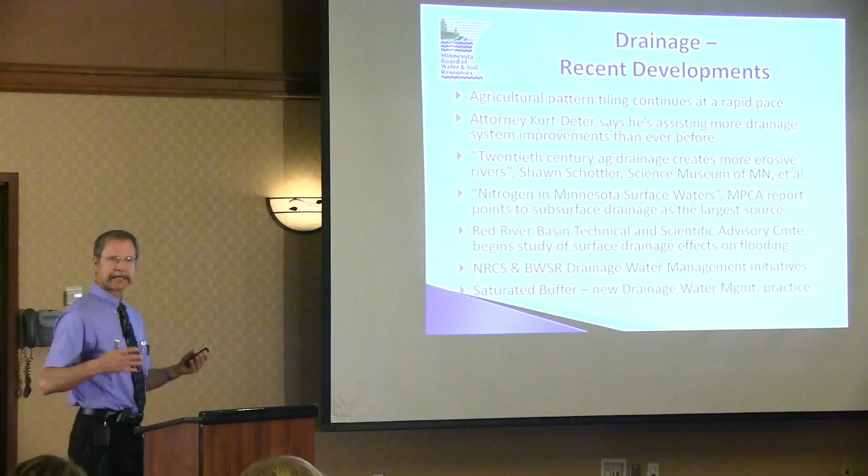What are some of the recent developments driving this? We know that pattern tiling continues to occur at a rapid pace. For a lot of folks in the city, that's a concern. For a lot of you on the farm, that's an improvement, an ability to improve productivity and move forward. Many of you might know Kurt Deter, an attorney who works for many drainage authorities, and in the last year he's said he's been assisting more drainage improvement projects than ever before. So there are a lot of drainage activities occurring, and for a lot of folks that's a concern, for a lot of folks that's progress.

Some of you have probably seen the report that Shawn Schottler and others from the Science Museum of Minnesota published this summer, called '20th Century Ag Drainage Creates More Erosive Rivers.' It's based on data from the Minnesota River Basin as a start, but then they looked at 21 different watersheds across the state to discern the effects of ag drainage on river flows and erosion. Brad referred to the Nitrogen in Minnesota Surface Waters report, a recent report by MPCA, which pretty clearly points to subsurface drainage as the largest source of nitrates and nitrogen in our surface waters. So that's a challenge.

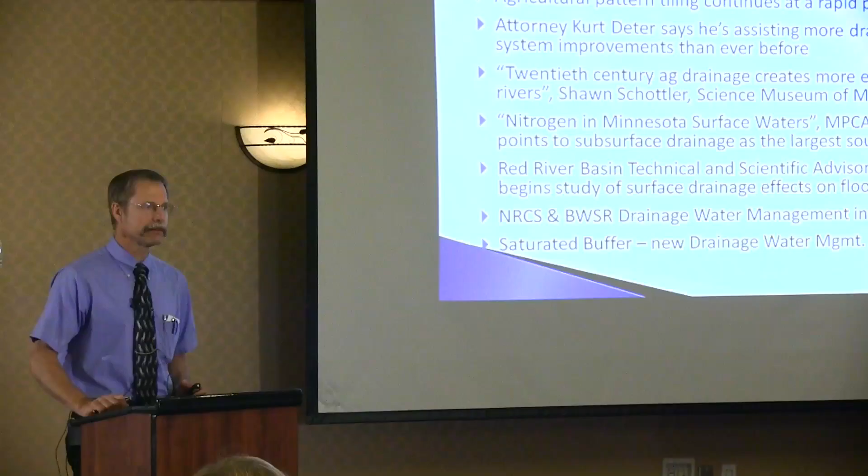The Red River Basin Technical and Scientific Advisory Committee is beginning a study about the effects of surface drainage on flooding. That group, of which I'm a member, did produce a couple of reports in the last two years about the effects of subsurface drainage on flooding. So something else that's worthy of review and consideration.

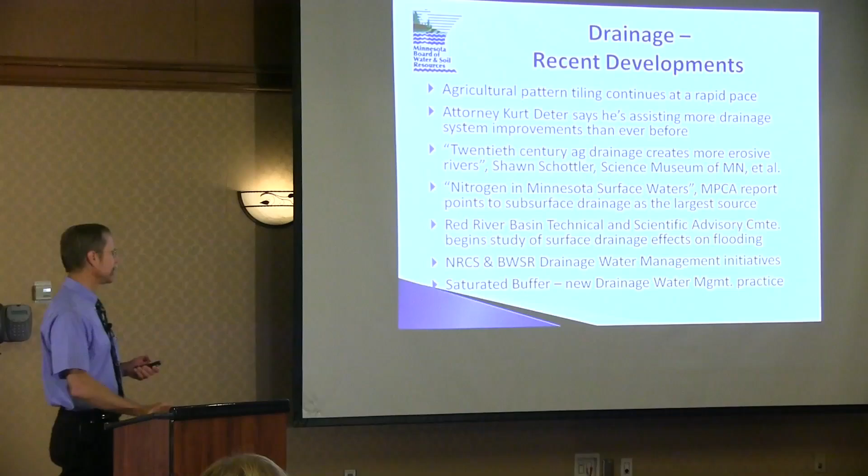In recent years, both NRCS, the Natural Resources Conservation Service, and BWSR have had drainage water management initiatives, trying to provide more financial and technical assistance for drainage water management and conservation drainage practices. Saturated buffer is a relatively new practice, and the first one in Minnesota is on Doug Albin's farm. Doug will be talking about that and other things when he's on at 11:30 today.

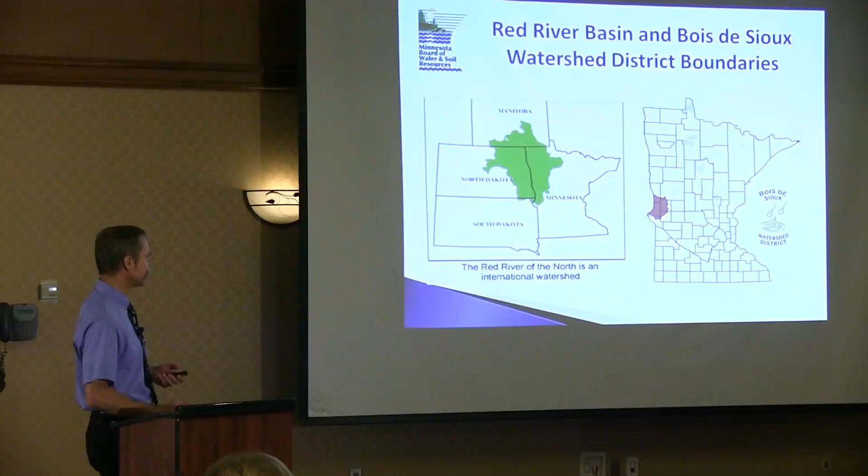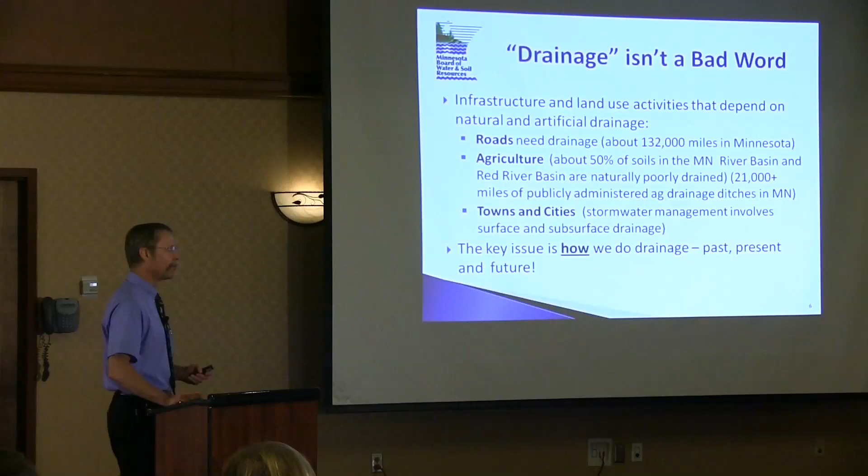This is a slide that I've used a number of times, and it has different reactions from different folks. But I believe that, in fact, we should consider drainage to not be a bad word, that it's been going on forever, within our state.

It's very important for roads to keep them drained so that they remain unsaturated and passable. And in agriculture, within the Minnesota River Basin and the Red River Basin, about half of the land without some drainage is very difficult to farm. Keep in mind that the publicly administered ag drainage systems across Minnesota, Chapter 103E drainage systems, total more than 21,000 miles. So it's a vast infrastructure of drainage.

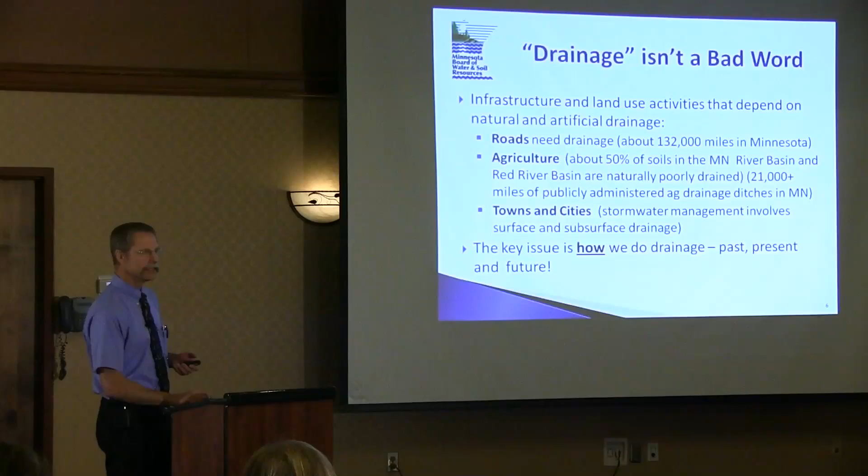And it isn't just agriculture that needs drainage. Towns and cities, stormwater management is a very important part of flood control within urban areas as well. So the way I try to stress this is that it's not a question of whether we're going to drain. We always have drained and we'll continue to drain. It's a question of how we do it. And what I'm here to promote is doing it for more than just one purpose.

Trying to build into it multiple purposes. Some of the concerns, again, water quantity, flood control is a significant issue. And that can be viewed in different ways. It isn't just urban flood control, it's agricultural land flood control. Brad referred to the concern that, well, when my neighbors upstream added drainage, now I'm flooding downstream. And certainly that's part of the concern we have to build into our considerations.

In recent years, we've experienced a number of droughts, and therefore managing our water to conserve what we can for crop production is also important.

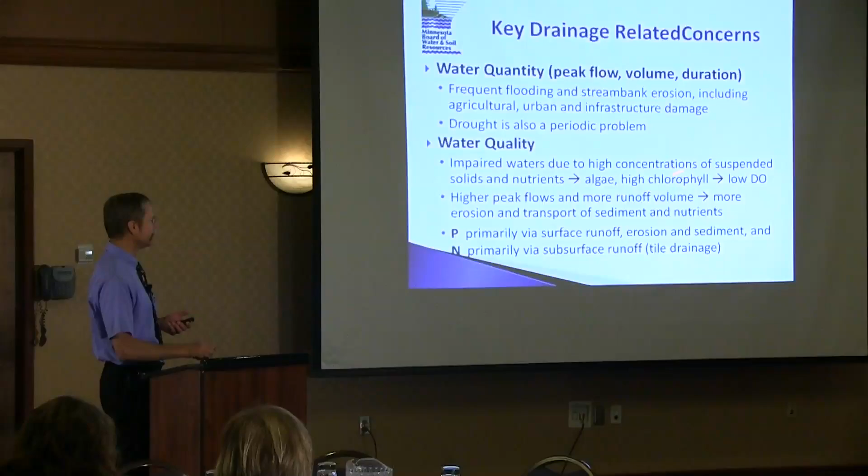Water quality, we have lots of impaired waters across the state. About 40% of the waters that have been assessed are in fact impaired. Concentrations of suspended solids is a big part of that, and nutrients as well. They lead to algae growth in lakes and rivers, high chlorophyll, which leads to low dissolved oxygen. Not good for fish, not good for other aquatic life, and that's a concern.

Higher peak flows, more runoff volume equals more erosion, more sediment and nutrients being transported. Keep in mind that phosphorus, P, is primarily transported via erosion and sediment. Phosphorus tends to bind to soil particles and be moved by sediment. Nitrogen is primarily an issue with subsurface drainage because nitrogen exists in many different forms, and one of those is nitrate, and nitrates are water soluble, so therefore they end up in tile.

So what are the primary methods that we can use for what I call multi-purpose drainage management? Well, runoff hydrology management is a key part of that. And we have many different practices, many different ways that we try to manage the water running off whatever land in terms of rate, timing, and volume to help reduce peak flows.

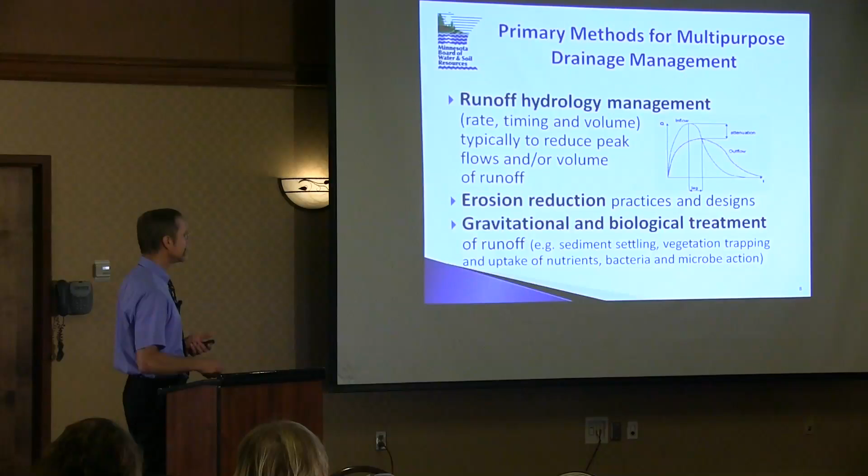This is a hydrograph showing flow on the vertical axis and time on the horizontal axis, indicating that if you have storage built into something, you can reduce the peak flow and extend the duration a bit. It's one way to manage our waters.

Erosion reduction practices and designs, something that we've worked at as conservation minded folks for years and years. So we want to keep topsoil where it remains productive soil. And we use gravitational and biological treatment of runoff, settling basins and water and sediment control basins, buffer strips and other types of vegetative ways to trap nutrients and uptake those nutrients. We also use bacteria and microbes as part of treatment processes. We'll talk about that in terms of wood chip bioreactors.

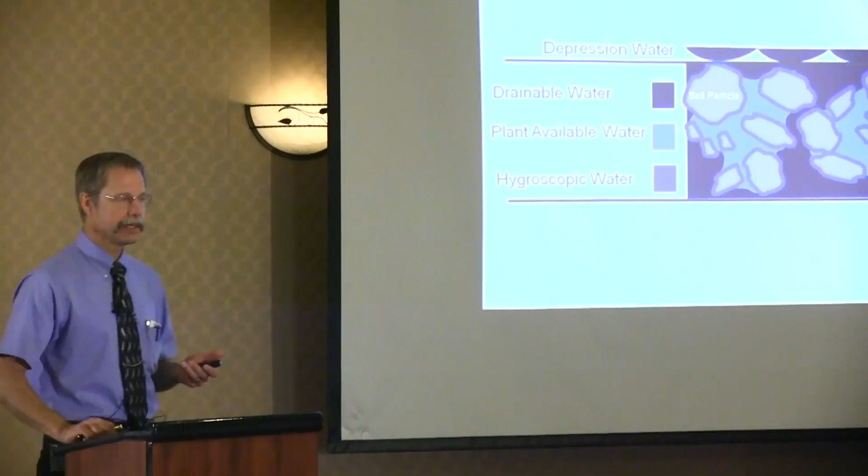So within the soil profile, there's hygroscopic water. That's the water that's bound tightly to soil particles. The only way to get rid of it is to bake it off. It's bound tightly. Then there's plant available water. That's the water that's in between these soil particles, that it's there because of capillary action, and it's not drainable water. But crops and plants can use that water, so it's plant available, but not drainable.

And then in between all those soil particles, the fissures and porosity, that's drainable water. And then depression water on the surface, not looking at surface drainage and runoff there, but the micro storage on the surface. What we were trying to look at is what happens whenever we affect one or the other ways that water is managed.

So what's one of the ways that the hydrologic cycle works? Evaporation from the surface is a key part of how water returns to the atmosphere. But there's also transpiration, and this is an area where there's sometimes controversy about the effects of tile drainage. Certainly where tile drainage results in a better crop stand, you actually have more transpiration capacity during that growing season.

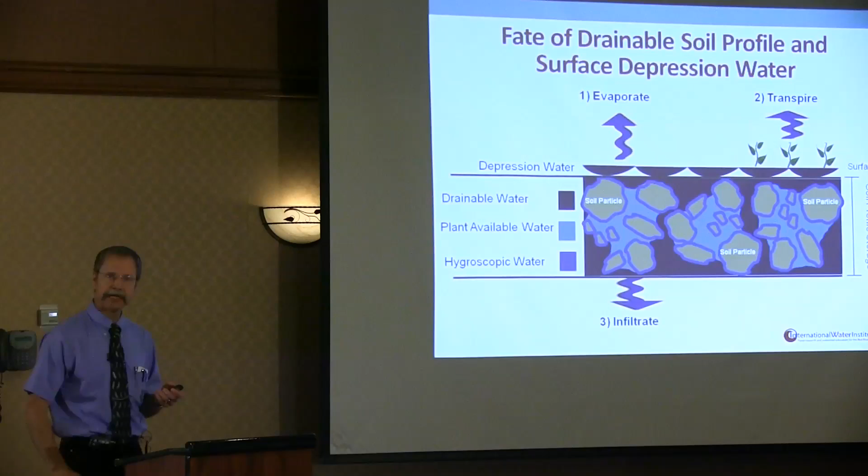What's another way that the water recycles? Infiltration, deep infiltration. This is an area with a lot of concern today about groundwater. The poster child within Minnesota is White Bear Lake, where they found one of the key reasons the lake has gone down and doesn't rebound is groundwater pumping, primarily for domestic water use in the metro area. Deep infiltration is how that groundwater gets recharged.

And then if we add tile drainage to the land, part of that water is shunted via tile and has less opportunity to transpire or evaporate. That's part of why the Shawn Schottler report indicated that with agricultural drainage, in this case tile but surface drainage as well, we do tend to increase the runoff volume, because more of that water has less opportunity to evaporate or transpire.

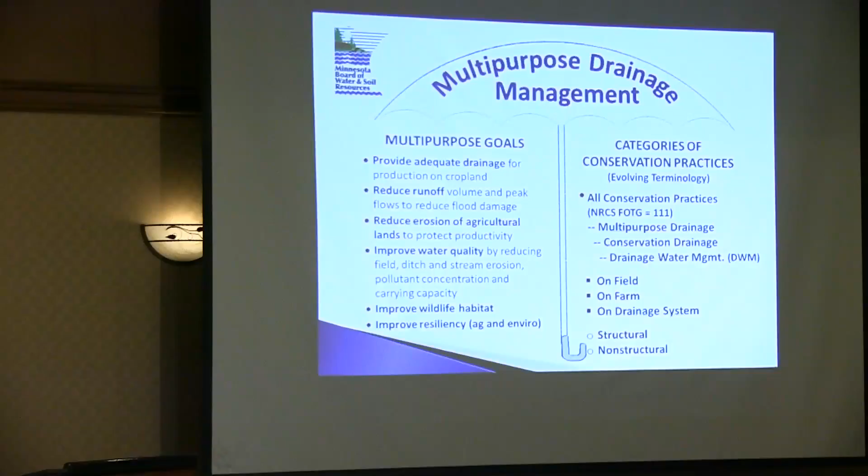So those are things to keep in mind as we look at different practices and how to manage water. I like to consider multipurpose drainage as the umbrella term, how we try to manage drainage for multiple purposes. Here are the purposes that I've outlined.

Adequate drainage for ag production. Key purpose: reducing runoff volume and peak flows to reduce flood damages, another purpose we can build into how we manage water. Reducing erosion of agricultural lands to protect productivity, something we've been doing forever, trying to have good conservation practices on the land to reduce erosion.

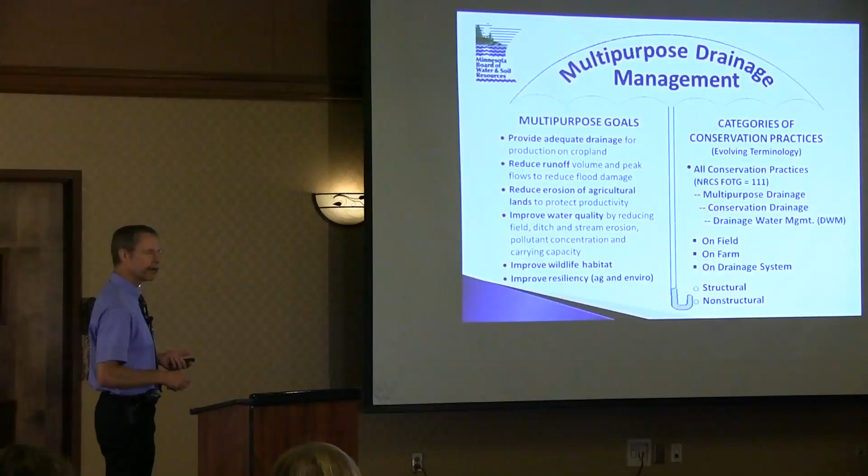And more water quality is a concern, and it's a purpose we need to try to build into multi-purpose drainage management. We can do that by reducing field ditch and stream erosion, by reducing pollutant concentration via nutrient management for example, and carrying capacity. So those are some of the ways conservation practices help manage for water quality.

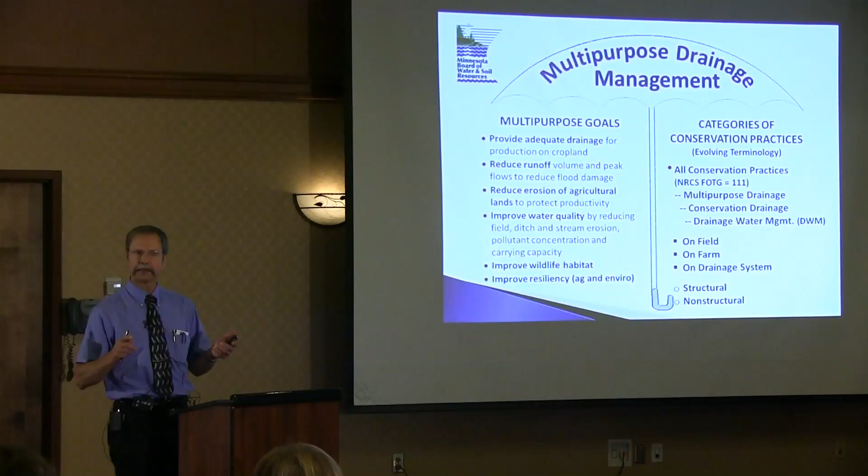And clearly, if we can improve wildlife habitat, that's a good thing. The other thing I think we need to think about is improving resiliency. That word is a good one to use, given that our rainfall has been a lot more intense in recent years. Therefore, one of the ways we can help reduce erosion and improve water quality is to improve the resiliency, the ability of the land to handle those high intensity rainfalls we've been getting in recent years.

Here's the way I like to think about a hierarchy of terminology. It's difficult to even talk about some of the practices because we all use different language. Within the NRCS Field Office Technical Guide, there are 111 conservation practices, and those are the field, if you will, of all conservation practices. From that, there are some that are multi-purpose drainage practices in my lingo, because they achieve multiple purposes on the land.

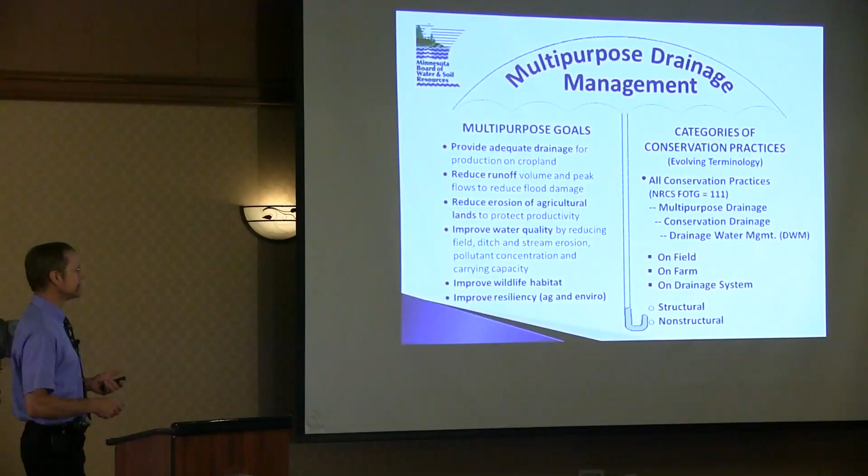And then within that, there's the subset of conservation drainage practices, something we have developed new practices for, water quality protection in particular, and water volume management, that we call conservation drainage practices. And then there's a subset of that that's drainage water management practices, otherwise known as DWM. I expect you'll hear a bit more about that from Anna Bramblett, who will be talking on behalf of NRCS today.

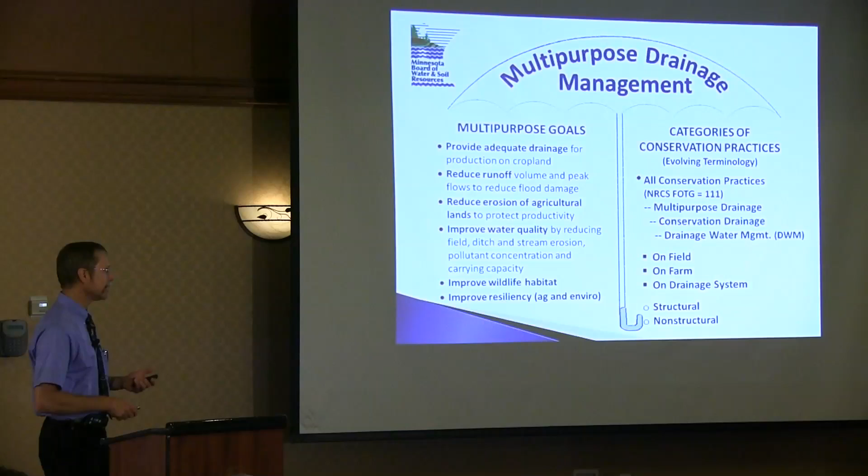Here's another way to think about those practices. We have on-field practices, how we farm, how we cultivate, etc. We have on-farm practices, and one of those might be wetland restoration, but it might not be on everybody's farm, it might be on some land that's suitable for that, not all. On drainage system practices, this is part of what we're trying to promote in terms of drainage authorities and private landowners. What can you do on your system, which again might be a wetland restoration, or some kind of a pond, if you will, that helps manage the drainage water on the system.

You can think about it as structural and non-structural practices as well. So here's a list of what I call old and new drainage management practices. Some of these have been around a long time.

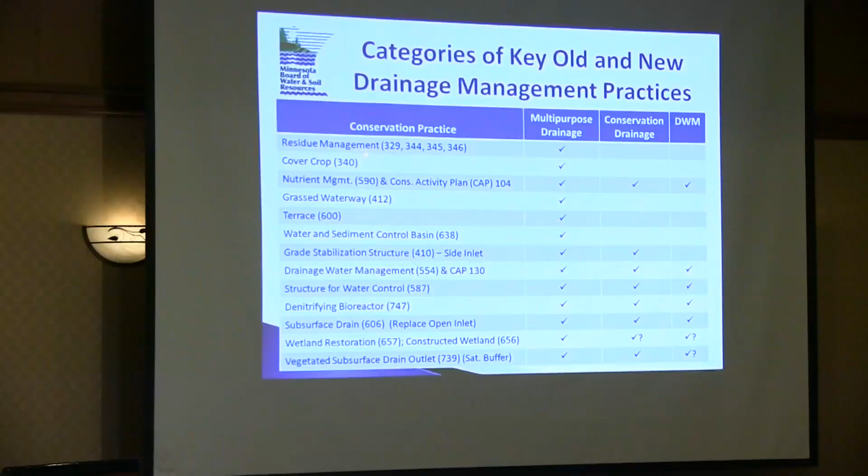Residue management, cover crop, relatively new one if you will, but not completely true, because we've used cover crops in agricultural production for a long time, but there's a resurgence of trying to look at why that really is a beneficial practice for water quality, erosion control, etc.

Nutrient management, and this Conservation Activity Plan is a nutrient management plan. Again, not something that's brand new, and in my opinion, this is one that we do call a conservation drainage practice. We call it a drainage water management practice because it's focused substantially on water quality.

Grass waterways, of course, been around forever, but they aren't quite as popular as they used to be because they're in the way for large equipment and for Roundup ready crops.

There's been more emphasis on water and sediment control basins in recent years because they fit better into agricultural production. And many people don't think about terraces as being something that is a water management practice, but it is, because it's one way to detain and meter flow and prevent concentration of flow that causes erosion.

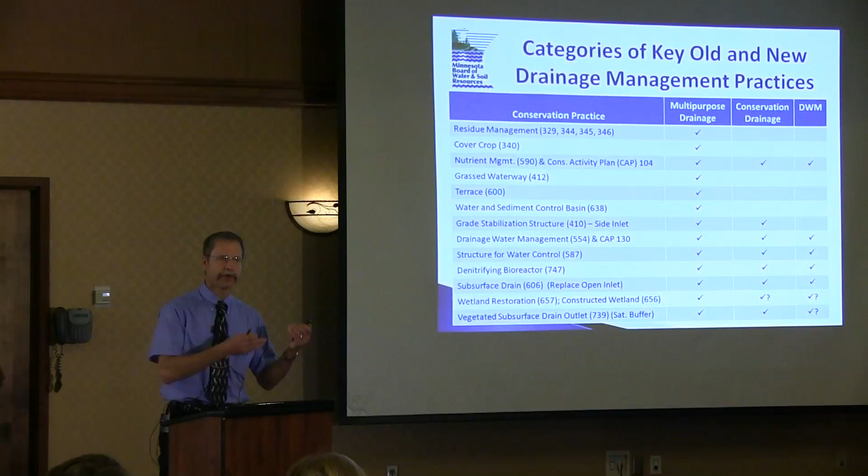And we have in more recent years, again, drainage water management practice. So really primarily about controlled subsurface drainage in our neck of the woods. And that involves structures for water control.

Again, a new conservation drainage practice, denitrifying bioreactor. I'll show you an example and we'll talk a bit about that as well.

Subsurface drain, replacing open inlets with dense pattern tile or gravel inlets, another way that we're trying to avoid direct movement of soil into a tile system.

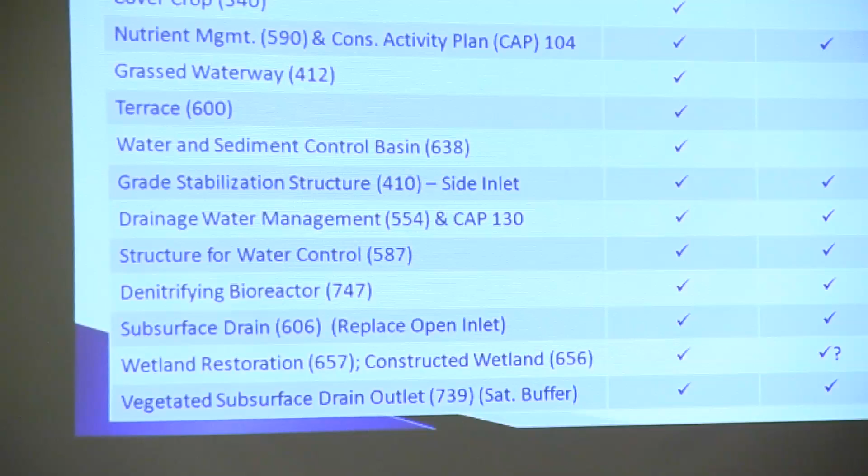Wetland restorations, constructed wetlands, and actually within that constructed wetland there's a CRP practice that has existed for several years, and we're trying to look at how can that be improved. Brad referred to it as a treatment wetland. So that's something where there's more emphasis on trying to figure out how we can provide good incentive and good technical assistance for treatment wetlands into the future.

And another new one, vegetated subsurface drain outlet, otherwise known as a saturated buffer. Doug Alban has the first one in Minnesota on his property. We'll hear about some more, I believe, and I'll talk about that a bit more as well.

So here's some of my guiding principles for trying to use multi-purpose drainage management. What are we trying to do? We're trying to avoid runoff concentration as well as wind erosion on our fields, protect concentrated flow areas from erosion, reduce peak flows to reduce erosion and flooding and improve water quality, reducing runoff volume and nutrient loss by increasing soil water storage and evapotranspiration. We have practices that can help do that.

Managing nutrients carefully, that's nutrient management planning and application. And certainly doing all of these can help build our resiliency to those intense rainfalls.

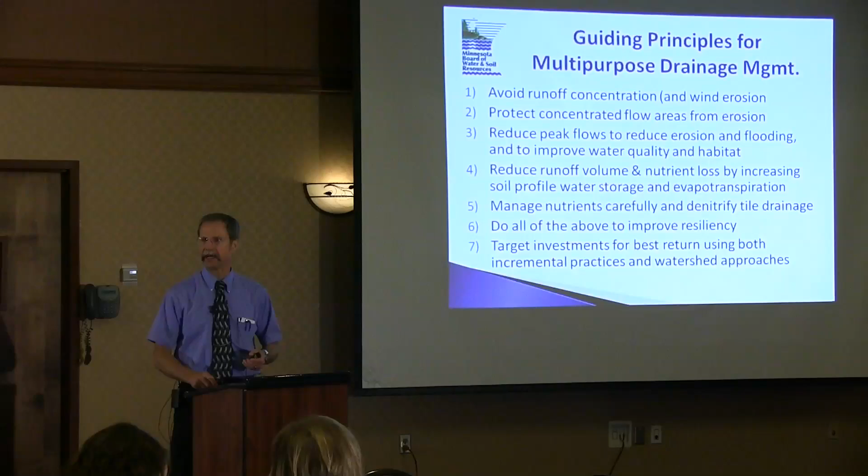And clearly something that the legislature is very concerned about is targeting. They want to make sure that the state dollars are targeted to where they'll produce the best investment, or the best return on investment. And I'm suggesting using both individual incremental practices, but also watershed approaches. Again, we're all trying to focus more on that watershed approach to how we plan and implement.

So, guiding principle number one, avoiding runoff concentration and wind erosion. How do we do that? What kind of practices? Well, certainly tillage practices are a key part of that. No-till, strip-till, more difficult in Minnesota than in southern latitudes, but we have certainly some farmers who have figured out how to make that work and incorporate it into their rotations.

Contour strip cropping, certainly down in the southeast part of our state, that's a very big deal because of the topography, and there's a lot of contour strip farming in that part of the state. There also is in other parts of the state where there's significant topography. Cover crops, again, something that I really do believe has significant opportunity, but difficult to incorporate in our rotations to date.

Protecting concentrated flow areas. Well, certainly grass waterways have been around a long time, and they work, but they also have their challenges. Typically, the biggest challenge is erosion adjacent to them, because it's difficult to keep your tillage going straight across them. If you run your tillage equipment down along them, I've got grooves in the soil that tend to focus the water, and I can have erosion right next to a grass waterway too. So it requires some careful management.

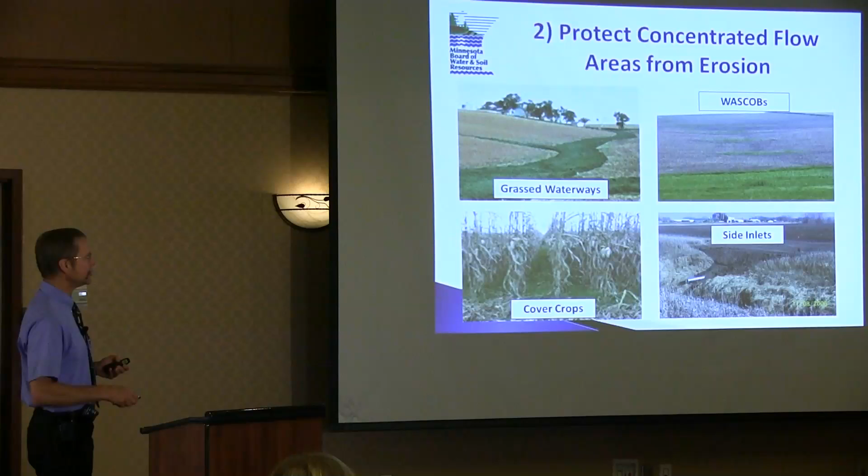These are WASCOBs, that's water and sediment control basins. You can't see this picture real well, but there's a series of 4 or 5 here in what otherwise would be a gully. These water and sediment control basins trap sediment, so it's a gravitational water treatment method. They meter flow, helping to reduce concentration of flow and reduce peak flows. This has been used a lot more in recent years because they don't take up a lot of footprint, you can farm parallel to them, and they aren't a big problem in terms of larger equipment.

Cover crops, again, can provide vegetation during the parts of the year where we don't have growing row crops. So there's significant benefit in terms of avoiding concentrated flow.

Side inlets, this is one that's a small pipe with a riser, trying to avoid erosion from field water into the ditch. It's a practice with a lot of benefits. Not only do you meter the flow, but you avoid this erosion, and by metering that flow you also get sediment trapping and water quality improvement. So it's a multi-purpose practice, if you will.

Terraces. Maybe not as popular as they used to be, but they still work just as well. In landscapes with a lot of topography, it can be a very beneficial practice in terms of keeping the productive soils on the land and also metering water, which helps achieve the multiple purposes of reducing peak flows, reducing concentration, and trapping sediment as well.

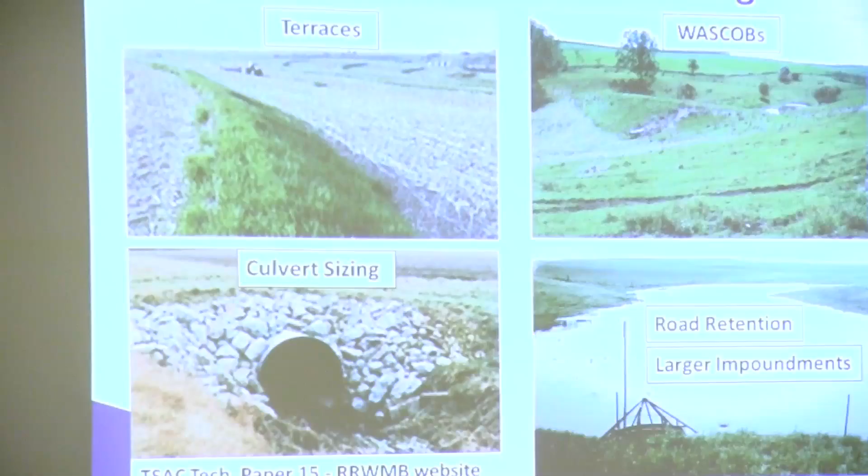This is a large water and sediment control basin down in southeast Minnesota where there's significant topography, and clearly these practices help trap sediment, meter flow, reduce peak flows, and reduce erosion downstream from them.

I tell folks that down in southeast Minnesota in 2007 we had a 500-year rainfall event, with lots of erosion and damage. In Winona County, they did a count of how many water and sediment control basins they have. The number is 1,600. Over many years there's been a lot of them built down there, and if you took a look in the watersheds below them, they did their job, and not very many failed. Most of them survived a very large event much bigger than what they were designed for. So again, a good practice where it fits.

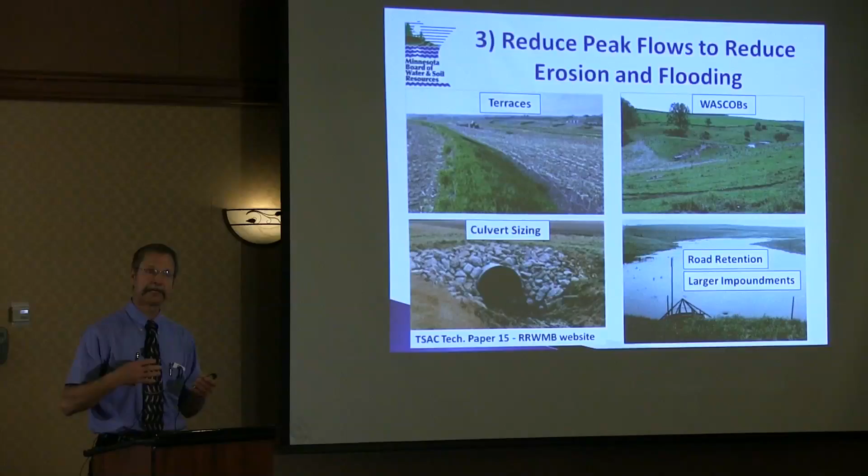Culvert sizing, something the Technical and Scientific Advisory Committee for the Red River Basin developed a technical paper about, number 15, on the Red River Watershed Management Board website. It addresses how we size our culverts to use our road network, which is vast, as a temporary detention system. Not trying to detain water for very long, 24, 30, maybe 36 hours, just helping to reduce peak flows. Clearly it can help reduce washouts of roads downstream and reduce flooding of agricultural lands downstream as well.

But it's not something that's an easy sell to a road authority. They're concerned primarily about safety, so multi-purpose is a bit of a challenge. But there are some areas where that has worked pretty well, one being down in southwest Minnesota. They do projects they call road retention projects, using the road as a dam. It may already be to some extent, but let's say it has an old bridge crossing that stream in a ravine or coulee, and the road embankment has poor sight lines. Whenever that road is improved, they need to raise it, and at the same time maybe replace that bridge with a culvert, put a riser on it and a low flow conduit at the bottom, so you can have some temporary detention.

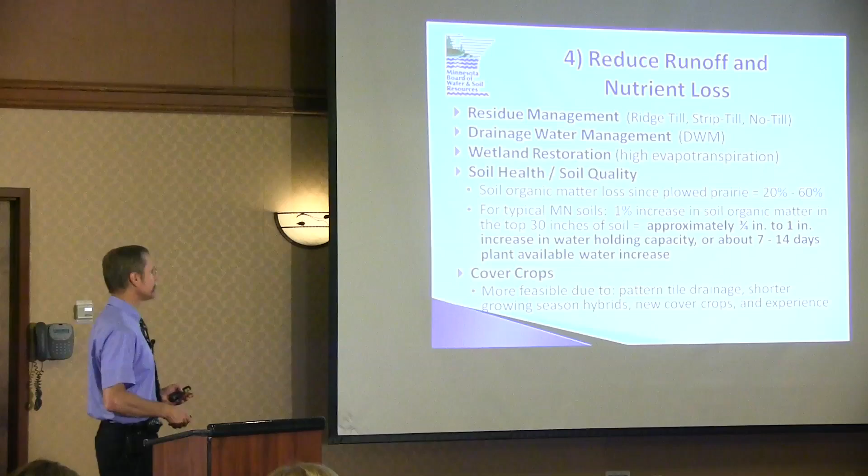Soil health, soil quality. This is another area of initiative in recent years, trying to promote the idea that we do need to think about soil health and managing soil biology as a way to manage soil nutrients, something that I think has significant promise.

I want to point out too that when we plowed the prairie to farm, we have some of the richest soil organic matter soils in the country, if not the world, because of all the prairie vegetation that existed. If some of you have seen the display in the soils building at the University of Minnesota, you know, 10-foot tall grass with 15-foot long root systems, very deep root systems, and they kept adding organic matter to that soil. So we're farming that legacy of soil organic matter.

But we have depleted a lot of our soil organic matter. Drainage actually is one of the ways that we deplete it, because the more we aerate the soil, the more we tend to oxidize organic matter. So how do we put it back becomes a real issue. But here's something else that I think is really important to consider.

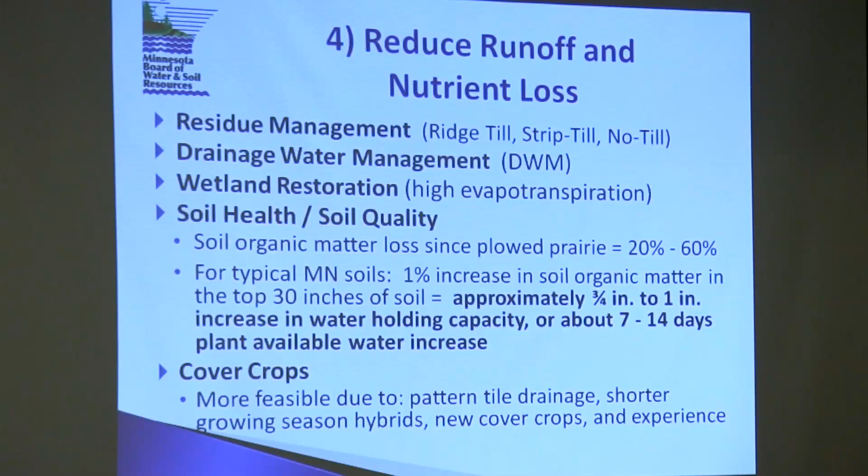Our soil scientists at BWSR had run some numbers. If we increased soil organic matter by 1%, how much difference would it make in the top 30 inches, the typical root zone for crops, in the water holding capacity of that soil profile? Well, for typical Minnesota soils, it's 3/4 of an inch to an inch.

The average runoff in the Red River Basin along the western side of our state is only 4 to 5 inches. So that's a big deal. That's a significant part of the overall water budget, if you will, within much of our lands.

And what's that worth in terms of plant available water? Well, about a week to 2 weeks more of plant available water. Remember, plant available water is not drainable. I can't drain it if I try. So therefore, it's bankable water, if you will. And it really can be there for our crops.

Cover crops. Again, all the research I've done looking into this, it's a challenge in Minnesota. But one of the things I point out is that with increased pattern tile drainage, we can much more reliably get our crops in on time. This year was quite a challenge because of weather, but certainly pattern tile helped provide more opportunity for getting it in on time. We have shorter growing season hybrids, corn in particular, so we have more window on the backside for cover crops. And there is more and more experience in Minnesota, so I think there's more opportunity.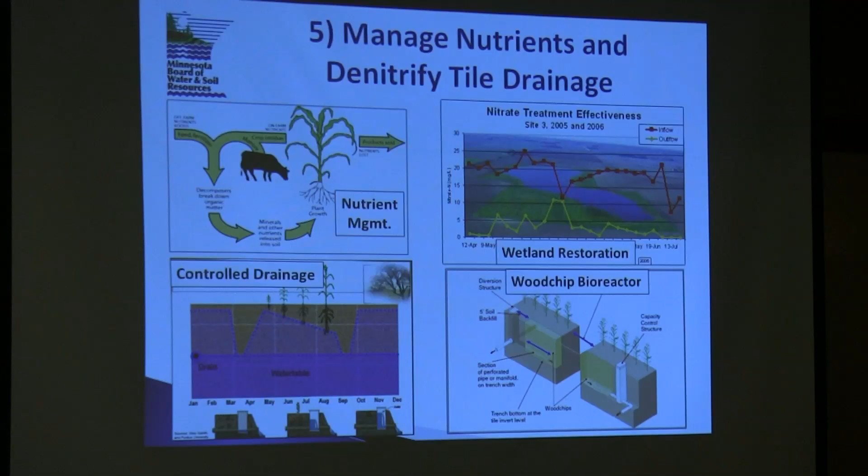Wetlands as treatment. This is one in Nicollet County that was restored via CREP and Reinvest in Minnesota Reserve Program. For a few years in the mid-2000s, it was monitored. The upper plot here in red is the concentration of nitrates coming in. The yellow is nitrates going out. Average of about 80% reduction in nitrates. It clearly works. There's no question that wetlands are good for nitrate reduction.

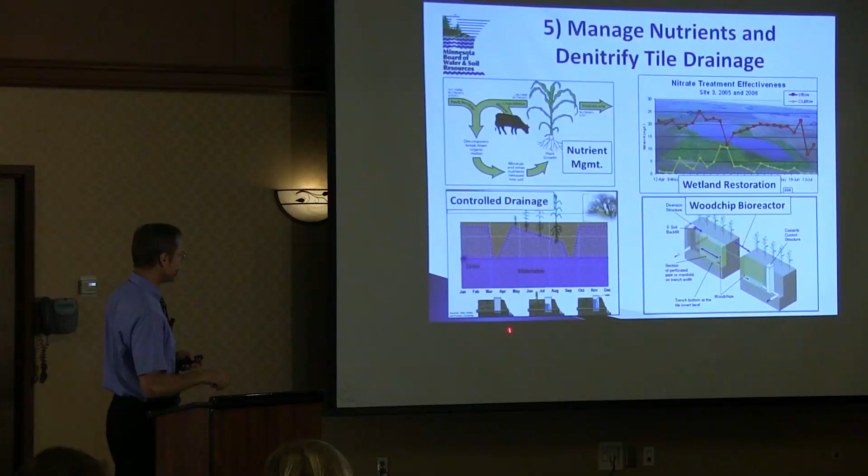Controlled subsurface drainage. Here's just a plot of soil profile water management during the year, trying to show how these control structures can be used to help manage the soil profile water during the year to help reduce the transport of nitrates in particular. And the way that works is primarily via managing the volume of water. So if I can hold the water back and I can have more of it be used for the crop, for transpiration of that water, then less goes downstream. There's less potential to transport nitrates.

Wood chip bioreactor, again using wood chips as a medium for bacteria and microbes that are very good at processing, breaking down nitrates into nitrogen gas, which is not a problem. The air is largely composed of nitrogen. So these work. One of the challenges is that you can't build them big enough typically to treat all of the tile water. So typically they're built to treat 20% of the capacity of that tile. And depending upon how the rains come, more or less of that water is actually able to get passed through them.

Both NRCS and BWSR have had drainage water management initiatives in recent years. NRCS has been doing it since 2012, using flat rates for the practices involved. The Board of Water and Soil Resources Clean Water Fund Conservation Drainage Management Program started last year because we were given an additional $700,000 specifically for drainage water management practices. I'll show you where the participating local governments are located. We use a 75% cost share rate, so 25% non-state match is required.

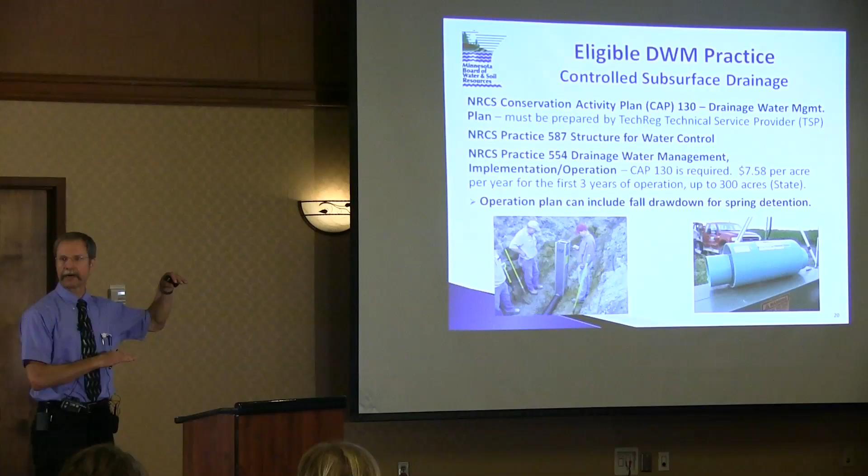Structure for water control—these are the types of structures. This is an inline stop log structure. This one's called a water gate; it's a float-controlled structure that doesn't need to be manually operated. If you raise the tailwater on it, it raises the floats, flips the gate, and holds back another foot of water. It works very well, and it's out of sight and doesn't require operation—a good invention.

There's cost share for the first 3 years of operation of those plans. I think Anna will probably tell you more about NRCS's EQIP program. Operation can include fall drawdown for spring storage, something very important to folks in the Red River Basin—trying to have that controlled subsurface drainage operated for multiple purposes: for water quality, by holding water back and letting crops use it, but also for potential storage of spring runoff in the soil profile. So it's a way to provide multi-purpose drainage management.

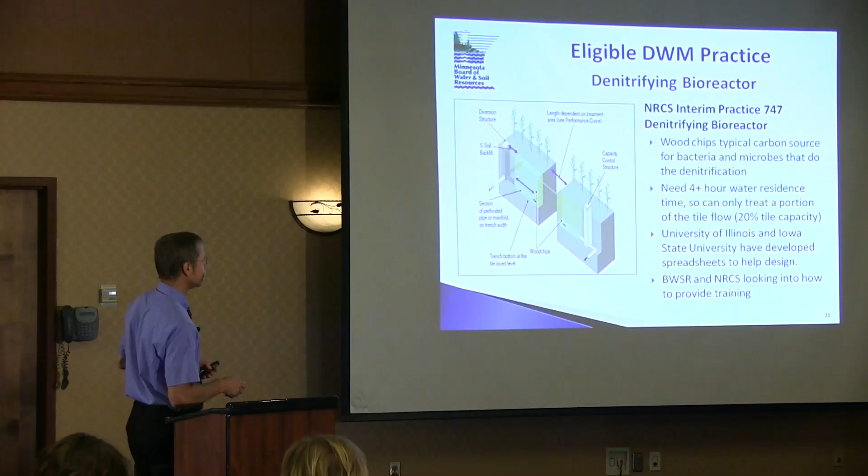I showed a denitrifying bioreactor—the interim practice standard for NRCS is 747. As I mentioned, wood chips are typically the carbon source used as food for microbes and bacteria to do denitrification. The anticipated lifespan of these is about 20 years, but there haven't been many around for that long, so it's a little uncertain whether they'll last that long. Still, the experience to date has been pretty positive that they hold up for quite a long time.

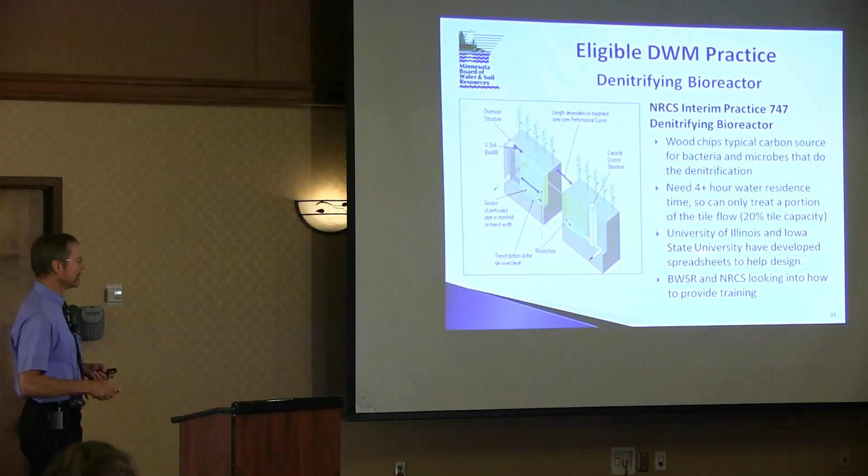You need about 4 or more hours of contact time for the water to complete the denitrification process, so it has to be designed for that residence time. It has control structures on both the outlet and inlet, so part of the tile water is diverted through it. Typically they're designed for 20% of the tile capacity so the size is reasonable. University of Illinois and Iowa State have developed spreadsheets to help design these, so there's a relatively straightforward and painless way to do it. We're looking at providing more training for designers of denitrifying bioreactors because they're quite new.

Nutrient management, just talked about again, is an eligible drainage water management practice. It's part of the overall equation of how we manage both the water and the nutrients, particularly to reduce nitrate movement downstream.

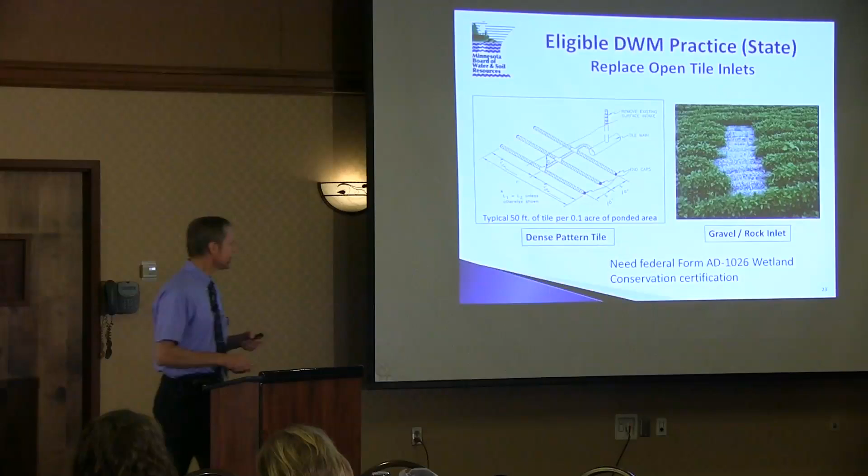The state drainage water management program does include replacing open tile inlets. You can replace an open tile inlet with a dense pattern tile, or gravel inlets are another way folks have done that. I'm not a super big fan of gravel inlets in terms of their water quality benefits, but we believe that over time soil does get into the gravel. Essentially it becomes a more pervious area than the soil profile itself and can trap sediment as the water is flowing into that system.

Something that Brad referred to that we have to be very cognizant of too is not running afoul of the swampbuster provisions. So you need an AD-1026 form for these tile inlet projects as well.

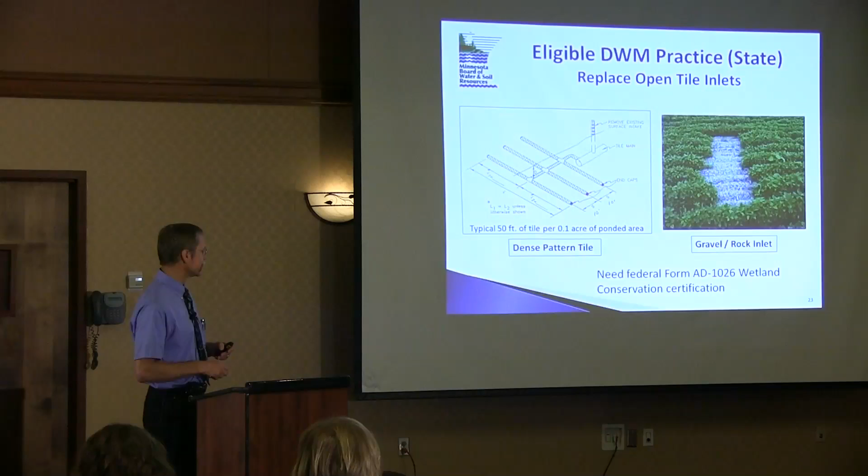I talked about this one as being a relatively new one. Vegetated subsurface drain outlet is the official title of this practice, which is interim practice number 739. It's otherwise known as a saturated buffer. I'll show you a picture of one so you can get an idea of how that works.

The first one that we know of for demonstration was along Bear Creek. Iowa State has done a lot of work along Bear Creek, which is not too far from Iowa State. So that's a place where they had done some work. Dr. Dan Jaynes from ARS, Iowa State, is heavily involved in those demonstrations.

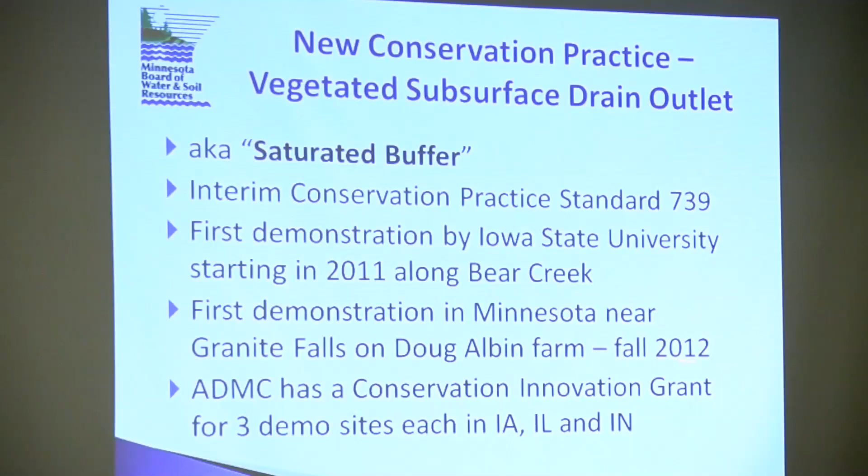The first demonstration in Minnesota is at Doug Albin's farm near Granite Falls, and it was installed late last fall. So I don't know if Doug has much data to date on that one, but certainly something we'll be keeping an eye on in terms of how it works. The Agricultural Drainage Management Coalition has received a Conservation Innovation Grant from NRCS for demonstrations in Iowa, Illinois, and Indiana as well. So this practice is being demonstrated around the Midwest to see how well it can help.

This is Bear Creek, where major buffer strips were put in this section, this reach, years ago. And here's where there are field tile, in these cases running down along the grass waterways. They put a control structure in that tile, put in a distribution line that's parallel to the ditch and the buffer strip, trying to push that water out from this tile into these distribution lines and have it soak through the ground to the creek.

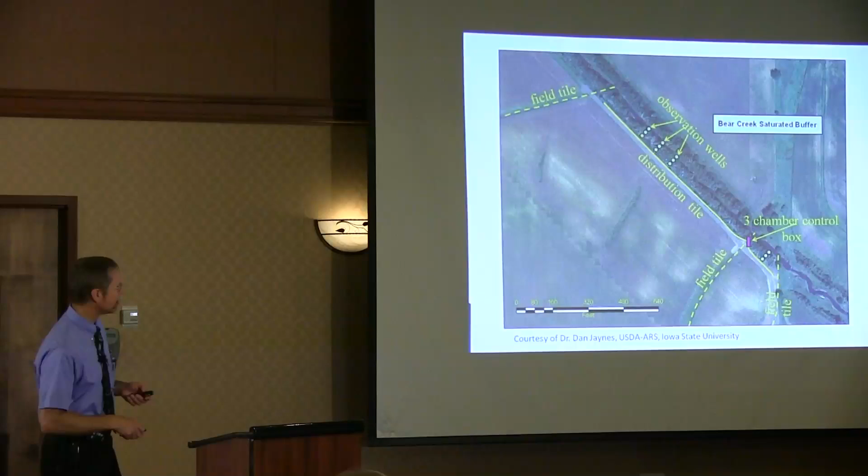They installed observation wells down there too to monitor, to see how effective this practice is. Here's a picture just showing the control structure here. So there's a tile that runs this way down to this control structure. This is the parallel distribution tile. Note that it is put back behind the trees because clearly putting it under trees, it gets plugged in time. So it's important to put it where you don't have the deep-rooted vegetation that can cause a problem over time.

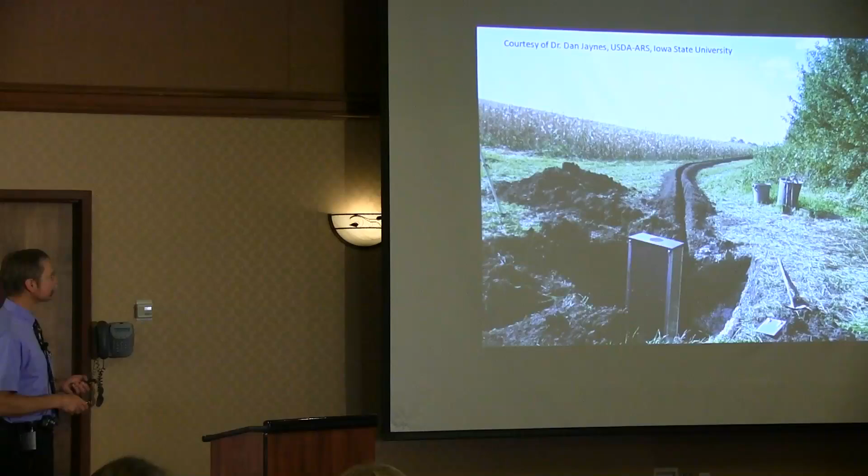In this particular case, they used a triple chamber, but normally you'd only use a double one. Here's that distribution tile. You'd want to have the stop logs here to be able to raise the head and push that water through those distribution lines. In this case, they had added a chamber because this is where they're doing their flow measurements for inflow, and here's flow measurement for outflow to see how much water is going in the distribution line. So in the demonstration, they used a triple chamber.

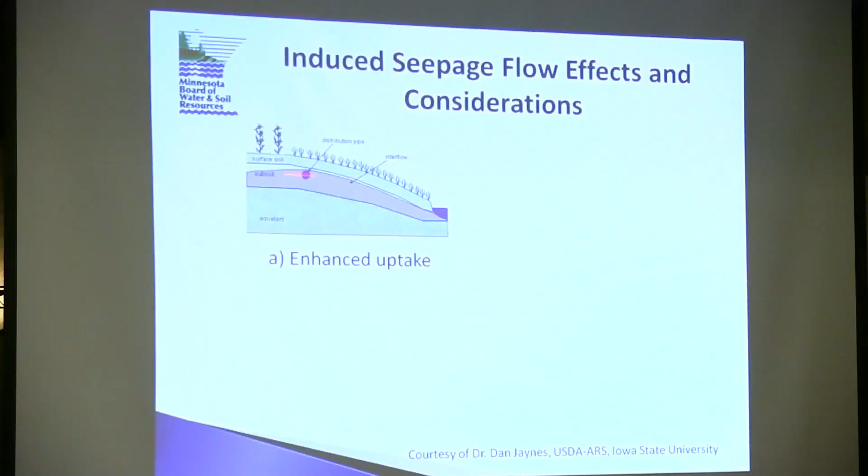So how does this work? Well, you're inducing seepage flow through the buffer, if you will. Here's that distribution line, and again, it's just using the principle of water moving through the soil, and you therefore provide more water for the vegetation in the buffer, so you get uptake of water and nitrogen in particular, and other nutrients as well. There's also denitrification occurring in this vadose zone, where bacteria are working in the soil too, so they help denitrify. So you're doing it via uptake, and via the denitrification process, using a biological treatment approach for drainage water management.

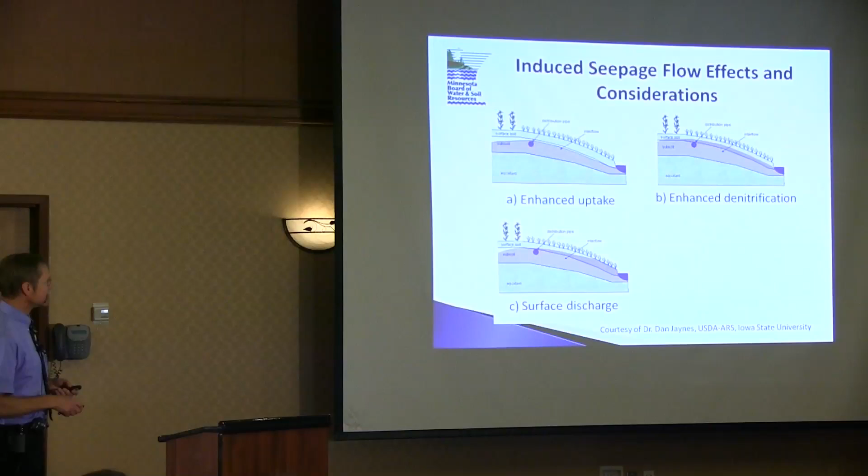Something to be aware of in the design of these is that you could potentially increase the surface discharge along the bank of the ditch or the stream, and it may end up causing slumping. So one needs to design these things in a way that tries to avoid that, and also consider what kind of soil profile you have, whether or not that might be more or less of a problem at a given site.

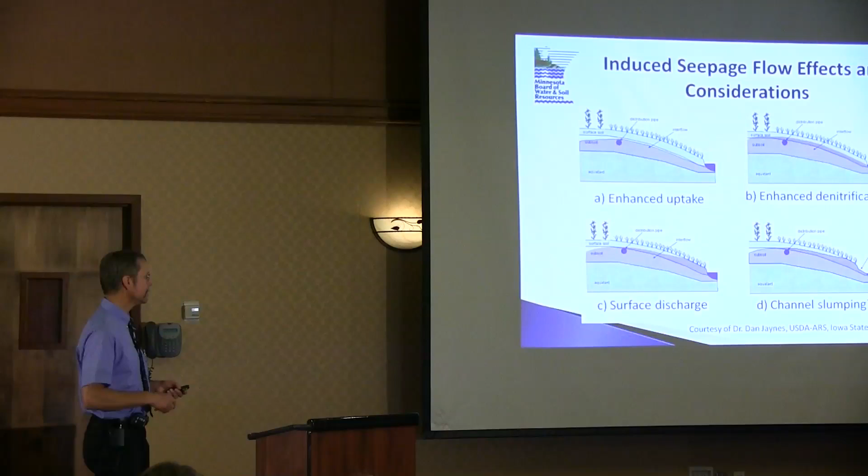And again, these last slides were from Dr. Dan Jaynes at ARS Iowa State.

So when do we really have opportunities for looking at multipurpose drainage? Well, whenever you develop a field or a farm conservation plan, look at multipurpose drainage as part of that. What can I do on my fields and on my farm to help manage water runoff? Again, avoid concentration, avoid erosion, and reduce peaks. What kind of conservation practices can I use to achieve that?

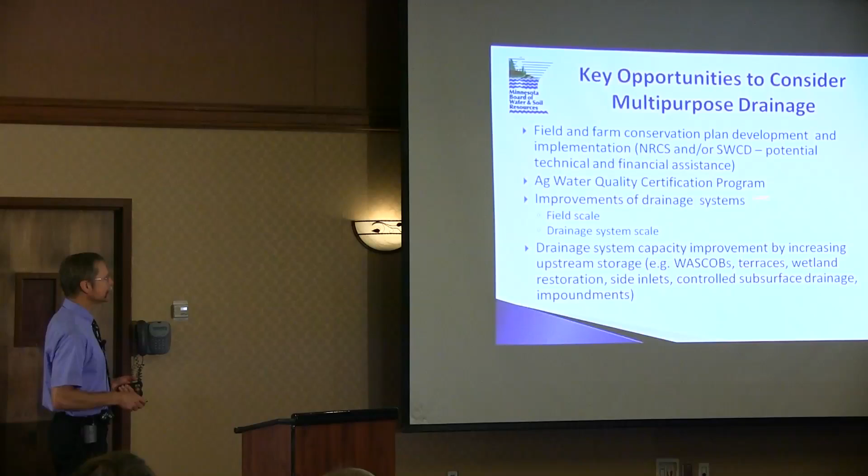You may have heard about the new Ag Water Quality Certification Program in Minnesota. Again, we're the first state to try to do this. It's certainly going to be an opportunity for conservation planning and for looking at how I can get my farm and my field certified by using multi-purpose conservation practices. So improvements in drainage systems at the field scale and at the drainage system scale, trying to look at how I can do this in a way that is more multi-purpose than maybe I have in the past.

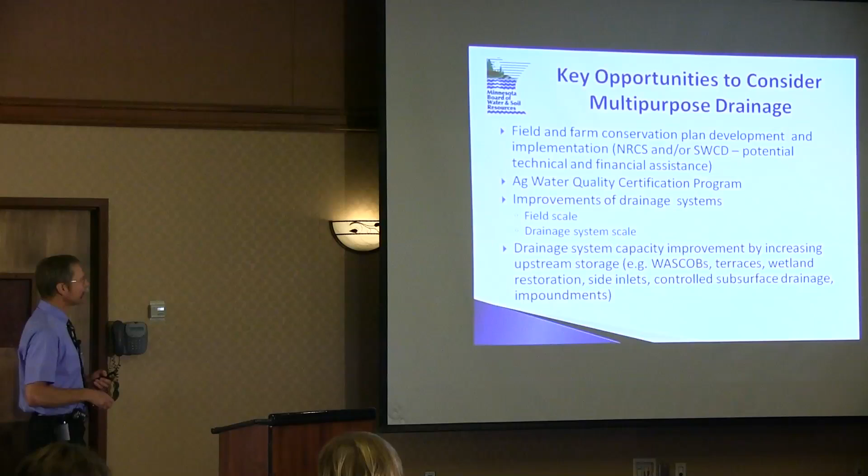What I wanted to stress here too is improvements. You remember I said that Kurt Deter is helping more improvement projects in Minnesota than he ever has before. It's a major decision point time for drainage systems, be they private or public. It's a time to look at whether going this route with these kinds of practices or this kind of design will be more multi-purpose, and whether we can incorporate that at the same time we're doing an improvement. It's a key decision point. So I'd just like to stress to anyone who's a drainage authority or drainage engineer that improvements are a key time to think about multi-purpose drainage management and design, because you're making a major commitment of money, a major commitment into the future for how that system is going to look and operate.

I'd like to point out too that there's more than one way to increase drainage system capacity. I can also increase capacity by increasing upstream storage - if I can reduce the demand on the system, I've essentially increased its capacity. How do we do that? Using water and sediment control basins, terraces, wetland restorations, side inlets - which not only solve an erosion problem, they provide an opportunity for very short-term detention along the drainage system, and there are many, many side inlets. So there's great opportunity along our drainage systems to use that practice. We talked about controlled subsurface drainage, trying to help save some of that water, particularly in the summer, for crop use, rather than sending it downstream along with nitrates. It's a practice that does work. And certainly larger impoundments too are a way to help manage storage and therefore manage peak flows of runoff, actually increasing the capacity of the drainage system downstream by managing that water upstream.

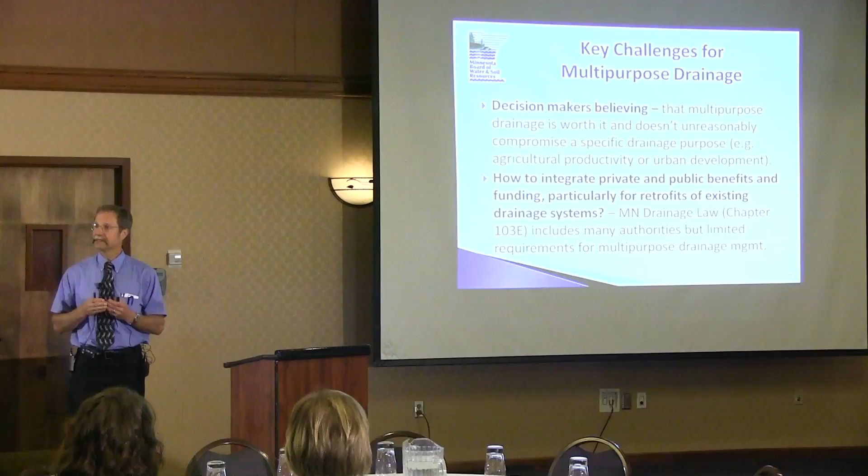But for a lot of landowners, the belief is that bigger and more capacity is better - the faster I get rid of that water, the better. The reality is, I don't really have to get rid of it right away. If I have an adequate outlet and know it's going to get off within a certain amount of time, I can achieve the objective of drainage for agricultural production while still not putting quite as much water as fast downstream. So here's another challenge that we have.

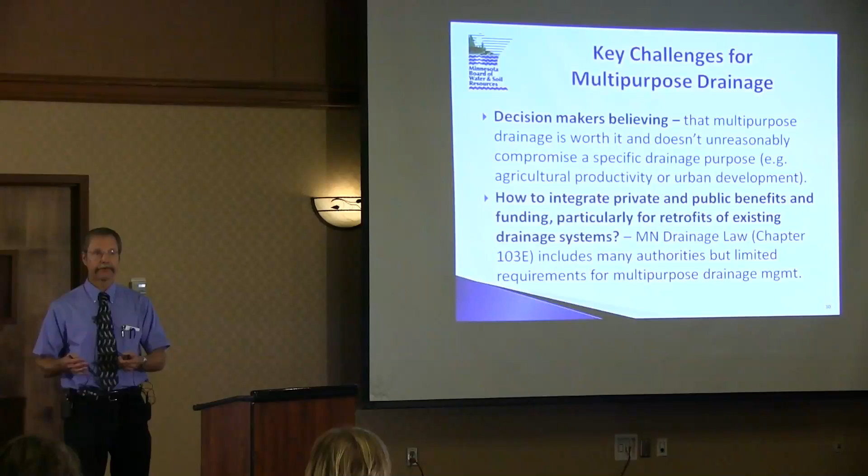How do we integrate public and private benefits and funding in a way that is considered reasonable for the landowner, reasonable for the public who is helping to pay for other benefits, say water quality, habitat, and all of that? We're always looking for ways to integrate public and private money in a way that's comfortable for all of us, that it makes sense, it feels fair, and we can achieve multiple objectives with an integrated design.

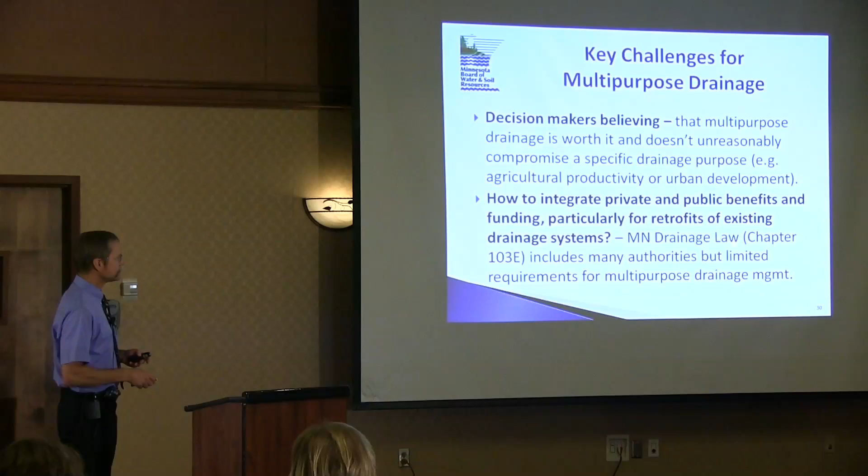In recent years, Minnesota drainage law has had provisions added to enable multi-purpose projects. They maybe aren't utilized as much as they could or should be, but they are there. There's an ability for our public drainage systems to incorporate outside money for wetland restoration, water quality, and flood control, so it doesn't all have to be paid for by landowners. Drainage water management programs are part of how we're trying to integrate public money into private systems for water quality protection.

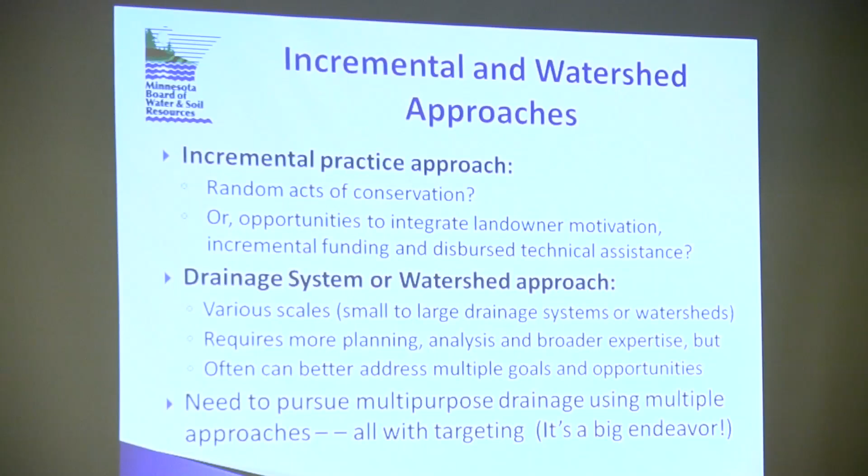I sometimes hear this at the legislature, that the way we do conservation is random acts of conservation, that our incremental practices here and there don't provide enough benefit, that they aren't worth it. Well, the reality is that for those of you who work for a local government unit and NRCS as well, you provide technical and financial assistance. We need to be ready when the landowner is ready. So for me, incremental practice implementation is a key part of what we do.

I pointed out earlier that in southeast Minnesota, in just Winona County, there are 1,600 water and sediment control basins. Those didn't occur all at once. They were incremental, occurring over many years, but they added up to a significant effect, a significant benefit. But more and more we are trying to think about planning and implementation at a drainage system and watershed approach, a very rational way to deal with that. How do we work together within a system to put practices where they fit, since they don't all fit on everybody's land?

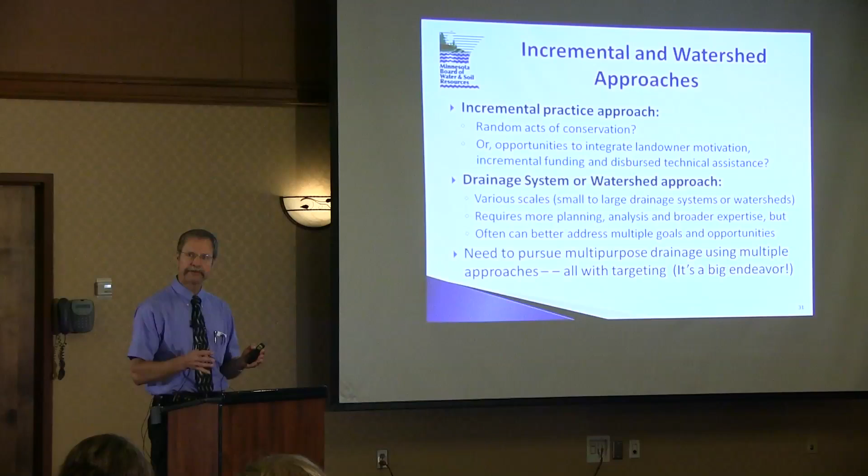So how can we integrate a watershed-based approach to planning and implementation so that we're taking advantage of topography and landscape opportunities for different practices that maybe don't work everywhere, but overall can really help the whole system. It does require more planning and analysis, broader expertise, but it often has much more opportunity to integrate these practices over a larger area.

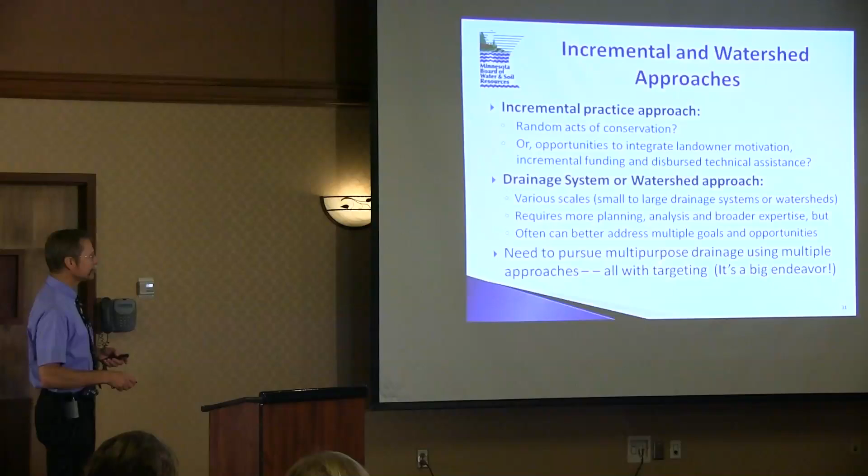So in my opinion, we need to pursue both the incremental and the watershed approach. And clearly, if we want to keep everybody happy about using money wisely, we need a target, trying to say where this money will do the most good. So targeting is a good thing. But we're talking about a big endeavor here. This isn't something that can occur in one or two years. We need to have it just move ahead as a trend, if you will.

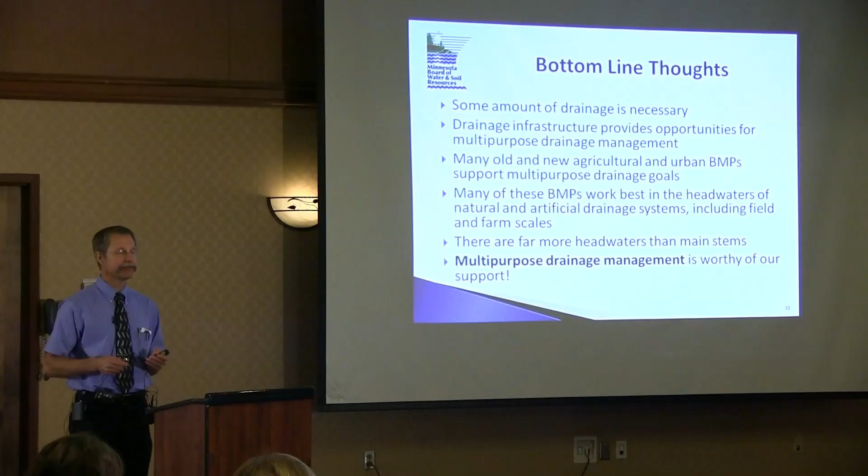Some bottom line thoughts. Some amount of drainage is necessary. Again, we've done drainage forever. All the societies before us did too. It's a question of how we do it, and can we do it more multi-purpose.

Drainage infrastructure is vast across this state, not just our state. All of the Midwest has lots and lots of drainage. That infrastructure, I'd argue, provides opportunity. How we manage those systems throughout all of our lands, both agricultural and urban, makes a difference. It can add up if we are together on how to do it.

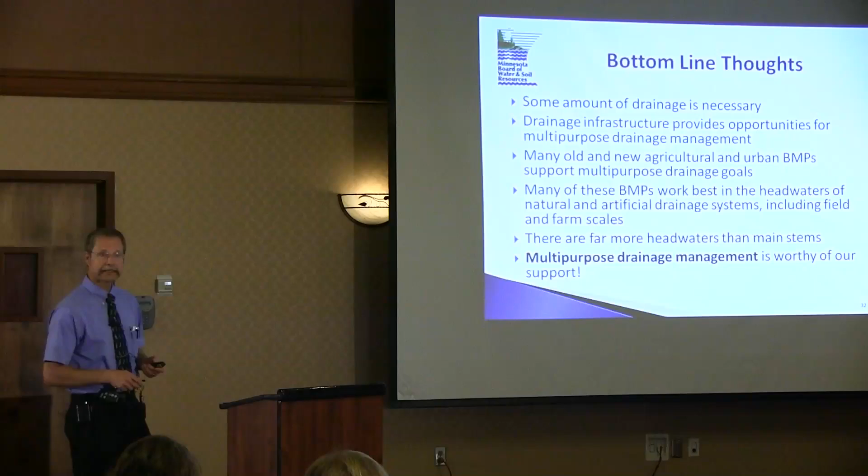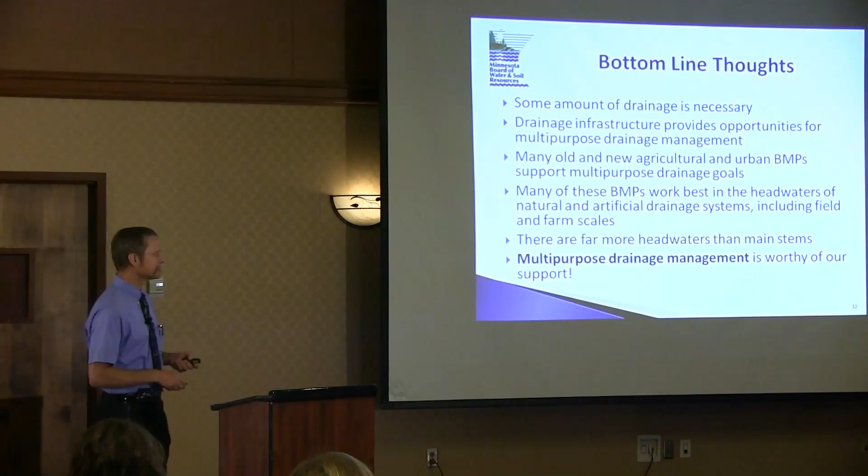We have many old conservation practices that I believe are multi-purpose practices. They fit under the umbrella of multi-purpose drainage. And we have many new practices we've developed in the last 10 to 20 years. We're trying to add many more conservation drainage practices, ways that we can achieve multiple goals with practices that make sense on the land. Many of those BMPs work best at the headwaters, where there's a smaller drainage area, and clearly there's a whole lot more headwaters than there are main stems.

So we have a lot of opportunity for how we can manage that runoff throughout systems starting at the headwaters, if you will. And therefore, I believe that multi-purpose drainage management is the right way of thinking. It's worthy of our support. And in order for this approach to be effective long-term, we need to figure out how we can work together, integrate it into our systems, in our operations, in the way that we manage all of our runoff.

Brad, I'm going to ask a question. I've got just a few more slides that I could use, but if we are tight on time, I won't. Okay?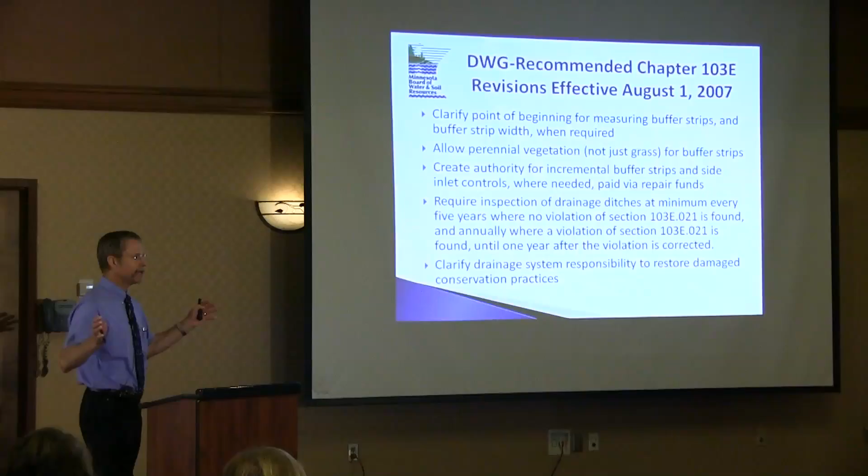I wanted to give you just an overview of some of the changes to Minnesota drainage law in recent years. They were recommended by the Drainage Work Group, a stakeholder drainage work group that's been around since 2006. It's a voluntary coming together of stakeholders from many different perspectives: agriculture producer groups, agencies, environmental groups, lobbyists, and all kinds of folks. We also have academic folks who are part of this drainage work group. Its focus has been on policy.

A lot of that focus has been on how we can update Minnesota drainage law to be more workable, more multi-purpose focused. One of the things we did, recommended back in 2006 and adopted by the 2007 legislature, was to clarify the point of beginning for measuring buffer strips.

It was unclear where to measure that 1 rod buffer strip from. Is it from where the top of the bank of the ditch was when it was first built, or where the top of the ditch exists now after it's been improved and maintained over many years? We said it should be at the top of the existing ditch—wherever that top of ditch is, start measuring from there.

We also clarified that for redetermination of benefits, the way the language was originally written—a requirement since 1977, with roots going back to 1959 when permissive authority was first given—stated that the 1 rod buffer strip was a minimum of 1 rod or to the crown of the leveled spoil. So they were trying to take it out to the high point of the spoil bank. But if you're doing a redetermination of benefits, there's no work being done on the ditch itself, so using that definition you'd end up with a variable width strip that's not very practical.

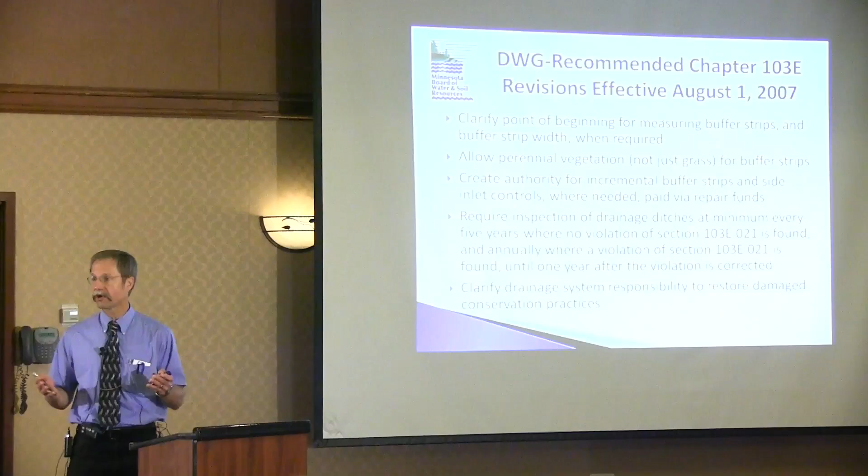Keep in mind, these side inlet controls have actually been cost shareable under EQIP and under state cost share forever. It's a grade stabilization structure—one form of grade stabilization structure—so they've been cost shareable for a long time.

We require inspection of drainage ditches a minimum of every 5 years. The previous language said periodically, and there was concern that's not very definitive—what if periodically is once every 100 years? Those ditches ought to be inspected more frequently, so the language was changed to require a minimum inspection every 5 years.

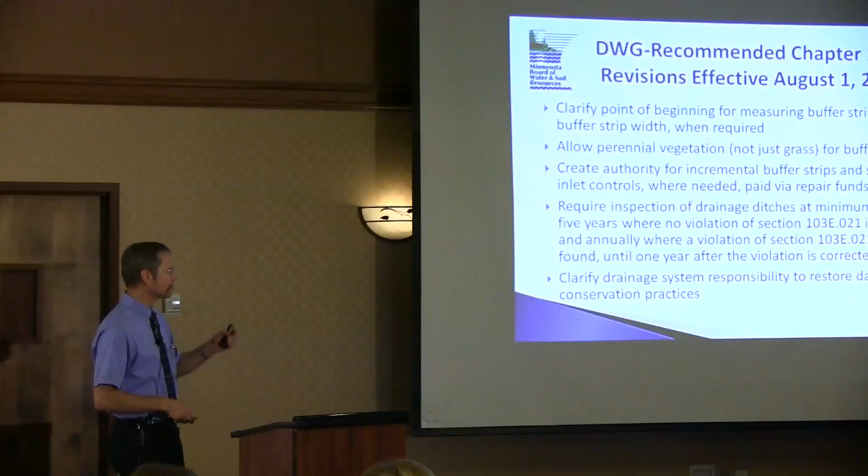And if there's a violation of 103E021, the buffer strip requirement, which is tripped by appointing viewers—not every ditch has a buffer strip requirement at this time. If viewers haven't been appointed for an improvement, a redetermination of benefits, or some repair requiring additional land rights, you haven't tripped the trigger yet to require that buffer strip.

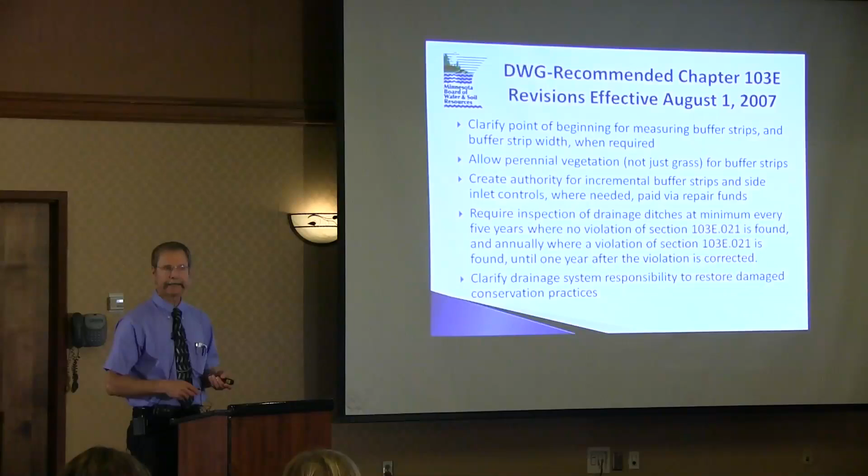But where that requirement exists, if there is a violation, then the ditch needs to be inspected annually until that violation is resolved. We also clarified drainage system responsibility to restore damaged conservation practices. There was concern that repairs were being done, and if there was a conservation practice along that ditch, say a buffer strip, that it was being damaged but not necessarily always repaired. This just clearly says the drainage system needs to repair it if they damage that conservation practice.

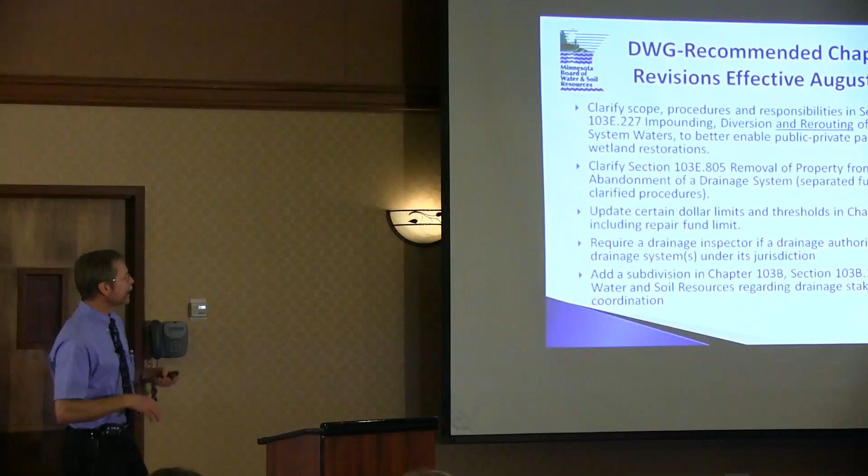In 2009, the Drainage Work Group took some more consensus recommendations to the legislature. They didn't get dealt with in 2009 because it was a very difficult budget year, and some of the policy things got pushed aside. It was brought back in 2010 and was approved.

One of the things we recommended was modifying 103E227—impounding, diversion—and adding this rerouting of drainage system waters. It's a piece of drainage law that we use frequently on public drainage systems when we're doing a wetland restoration, so that the drainage system needs to approve that restoration that's part of the system.

Sometimes we have to reroute a tile or a ditch around a wetland restoration, and it wasn't clear who owns the ditch if we do that. So we clarified the language to say that if we're rerouting a public system, the public entity owns that - actually, it's the landowners who own that system, but it becomes part of the system and should be maintained just like the rest. We also changed the language to better enable public-private partnerships, so programs and public drainage systems can work together to do what's best for the drainage system as well as that wetland restoration on private lands.

We also split Section 805, which is the removal of property from or partial abandonment of a drainage system. If you're going to do a wetland restoration on a drainage system, particularly at the upstream end, there's no reason for that drainage system to be maintained - as a matter of fact, we don't even want it to be maintained if you're going to do a restoration. So a partial abandonment needs to occur, and the language was very unclear as to exactly how to do that. We split these functions into 805 and now 806. It's a lot clearer, and we're having a much easier time working with drainage authorities for wetland restorations because of these changes in the law.

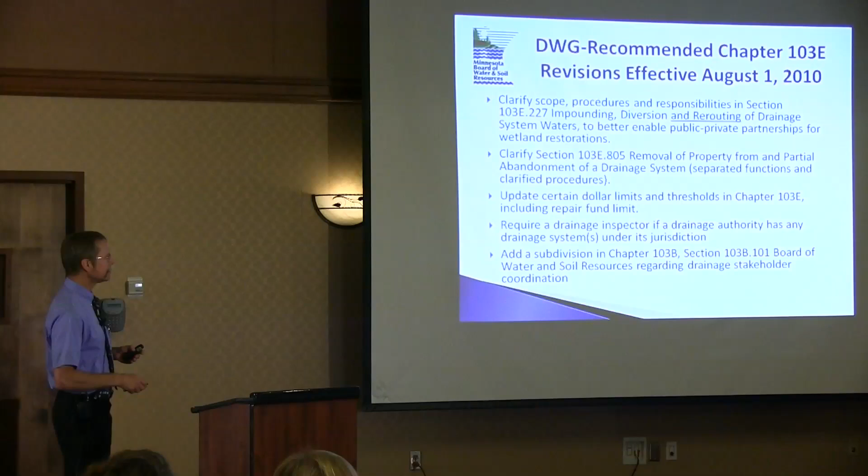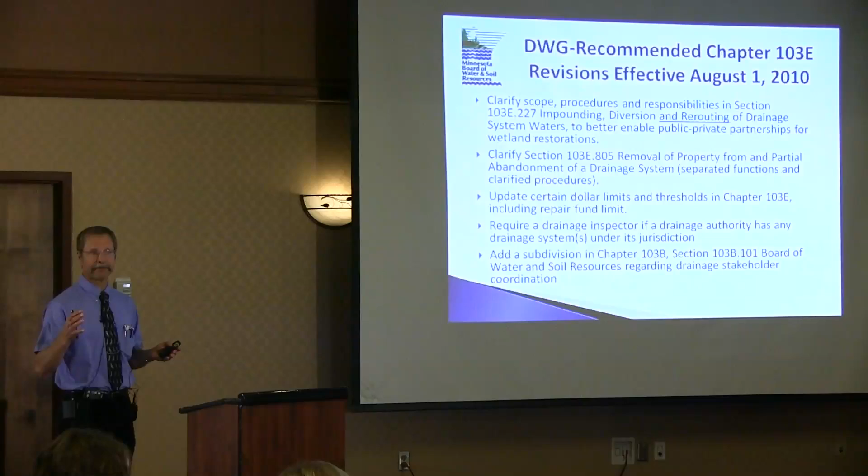There's a lot of dollar limits within drainage law. One of those was how much money a drainage authority can maintain in a repair fund, and there was concern that number was highly outdated - the last time it was changed was 1980, when it was $20,000. If you index that up by inflation, it's like $100,000. So that's what we recommended, changing it to a $100,000 limit, and we went through all of drainage law looking at those numbers, thresholds, and limits, and updated all of them.

Some of those needed to be updated to correspond to changes in Uniform Municipal Contracting Law. The limits within it had been updated a year or two before, so those were also made to correspond.

Requiring a drainage inspector - if a drainage authority has any Chapter 103E systems under its jurisdiction, it needs a drainage inspector. It doesn't say who it has to be, doesn't say it has to be a full-time employee, just says you need somebody who performs that function.

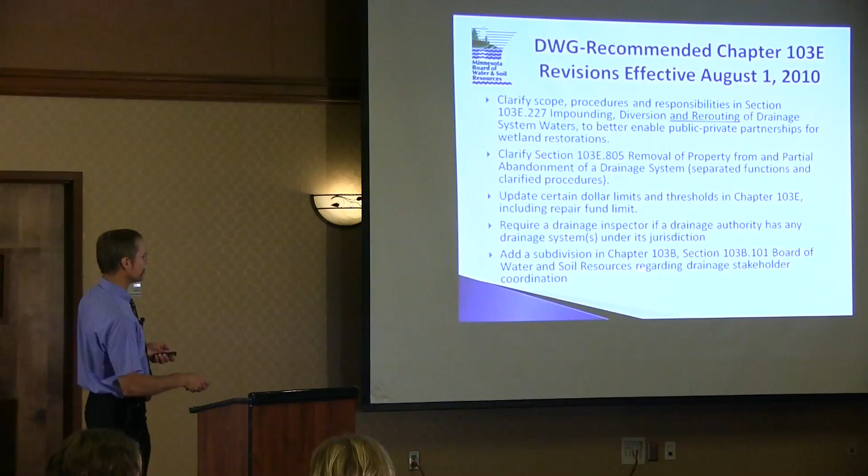We also added authority for BWSR to do this drainage stakeholder coordination. We didn't really have any clear authority to facilitate the drainage work group. This year, there's some more provisions that were adopted by the legislature.

We added provisions to clearly enable reestablishment of drainage system records that are lost, destroyed, or otherwise incomplete. Drainage authorities have been doing this for a long time, but it wasn't clear how they're supposed to do it, so now we have a consistent definition of how to do that.

Enabling an official copy of drainage system records - for example, where part of a system is turned over to a watershed district but not the whole system, both the county and the watershed district need records. This authority now enables an official copy.

Clarifying authority for wetland and water quality improvements - again, this was that impoundment section, this is repair - just clarifying that drainage authorities can integrate wetland and water quality improvements.

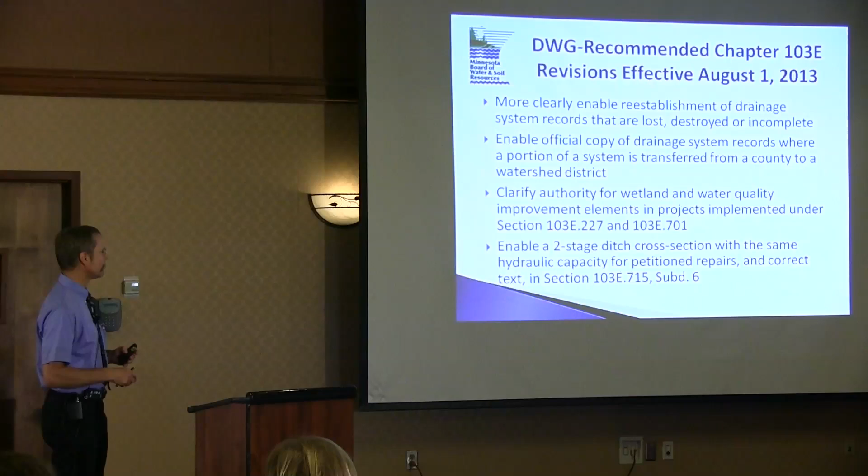And here's another one that we did - we enabled a two-stage ditch cross-section where there's a repair by petition, and we corrected some language in there.

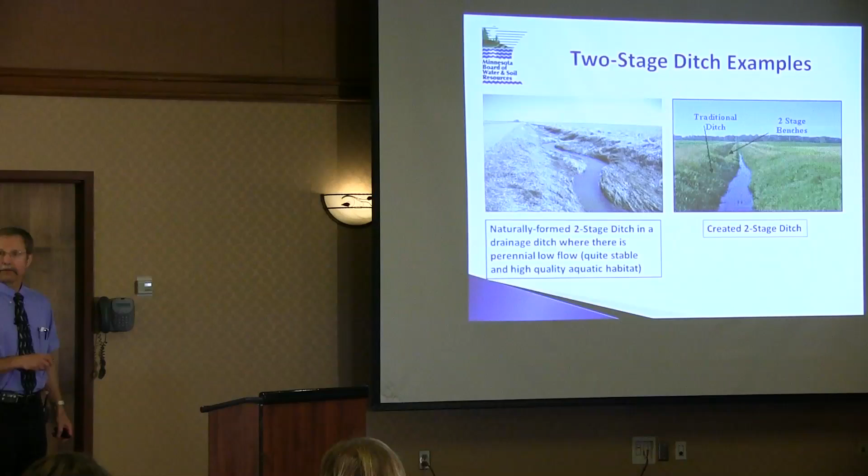One more slide. This is a two-stage ditch on the left. This is an existing drainage system, the south branch of the Buffalo River, where there are springs at the headwaters, so it runs all the time - perennial low flow. Mother Nature carved a low flow channel within that trapezoidal ditch, and there had been sedimentation over the years too, but there's lots of good aquatic habitat in this ditch. It may not look like much, but it's actually about 4 feet deep, and it has riffles and pools, great habitat, and in fact there are fisheries in this because it's a spring-fed system.

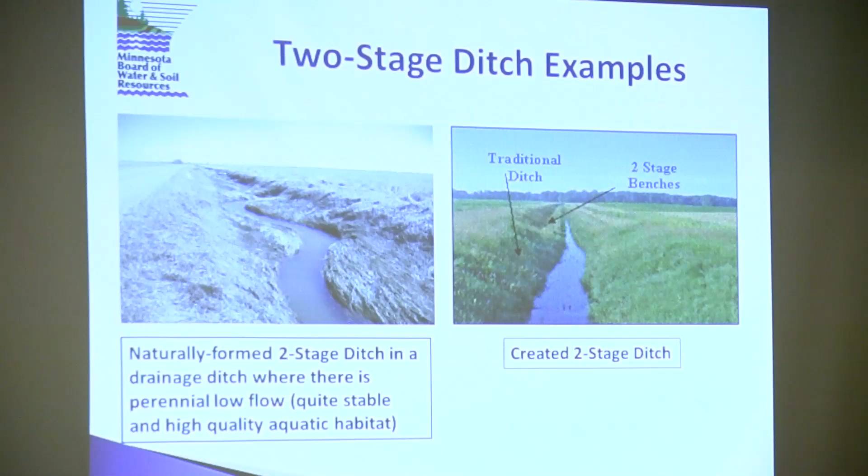Here's an example of where a two-stage ditch was put downstream of a trapezoidal ditch, just to see what that looks like. What that authority now allows is the drainage authority could, instead of digging this out and having it return to this shape over time, potentially widen the ditch a little bit and create a two-stage ditch that has the same hydraulic capacity as the original ditch had, just a different cross-section. So it's something the law didn't really provide for in the past, but now it does.